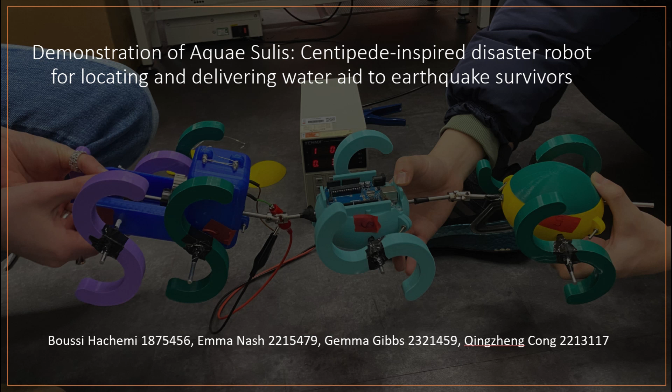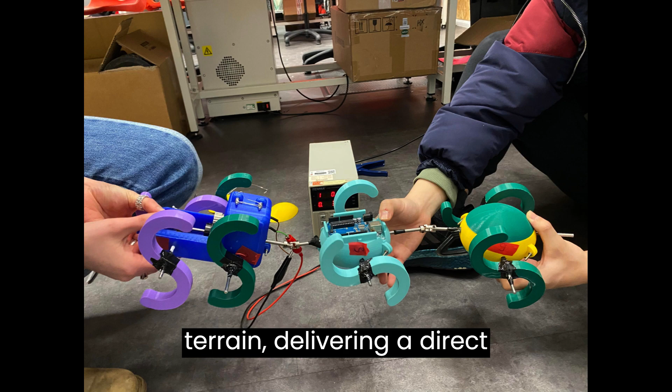Our project goal was to develop a cost-effective, bio-inspired robot to navigate and maneuver through unstructured rubble and underground terrain, delivering a direct communication line and water aid to trapped survivors following an earthquake. This led to the development of SULIS, our centipede-inspired robot aptly named after the Celtic goddess of water.

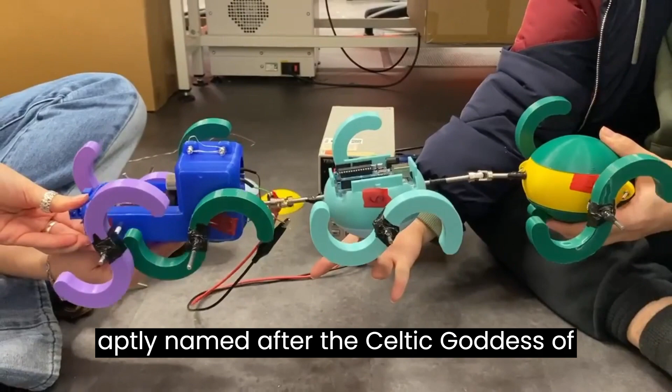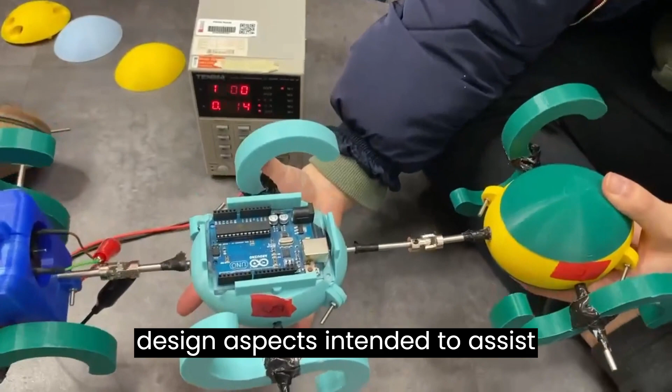Our goal for this demonstration is to provide proof of concept by exhibiting the first steps of this development process, including a functioning modular design with specific design aspects intended to assist movement across the unstructured terrain.

This project was motivated by the increasing occurrences of natural disasters worldwide due to climate change, often leading to the loss of human lives. The first 72 hours post-earthquake are crucial to locate survivors and provide first aid. Although current robotic solutions, including drones and large ground robots, have been used to locate survivors, their applications are limited in scenarios where victims are hard to locate underground and in tight spaces.

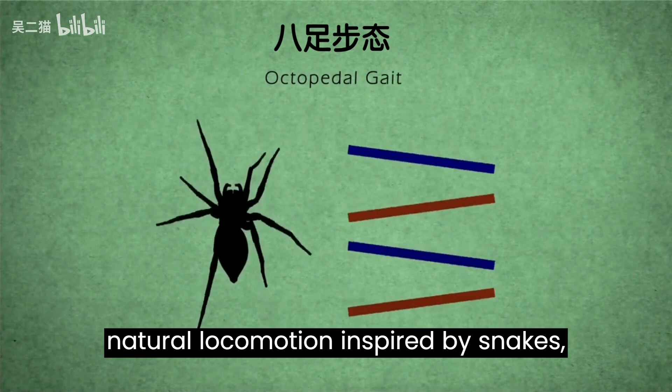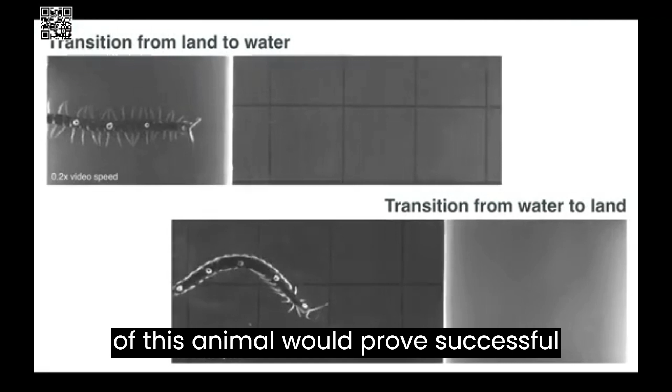We investigated multiple methods of natural locomotion inspired by snakes, salamanders, and centipedes. Due to the centipede's ability to adapt and navigate through challenging environments, we decided that biomimicry of this animal would prove successful, with a modular design with multiple legs working according to a central pattern generator, CPG, network.

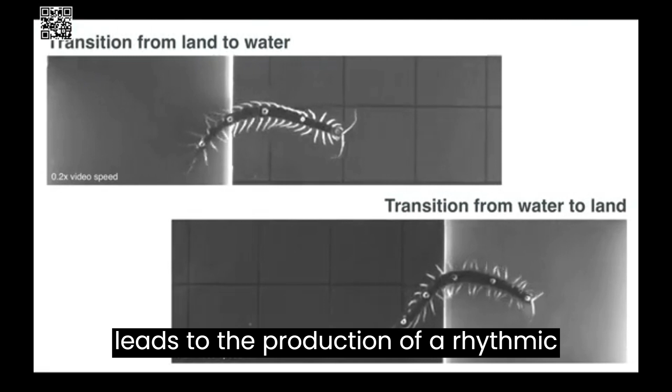This is especially important because it leads to the production of a rhythmic leg motion that stems from the morphological properties of the centipede's body and requires minimal computation.

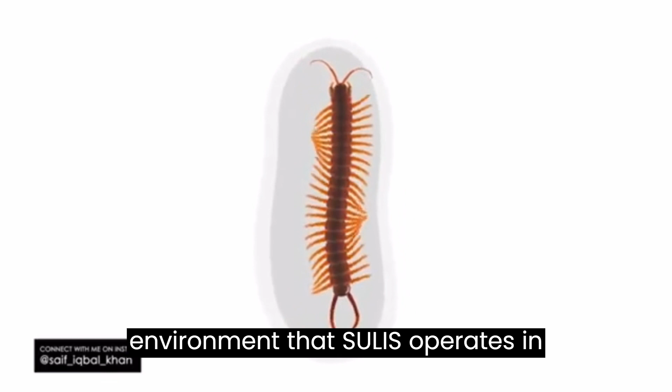The unpredictable environment that SULIS operates in provides several challenges. The robot may need to traverse a variety of surfaces such as soft soil, steep inclines, and large steps. Therefore, a robust body and adaptable locomotion system is needed.

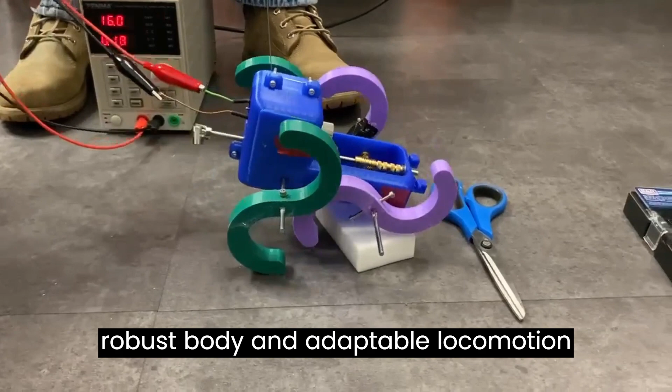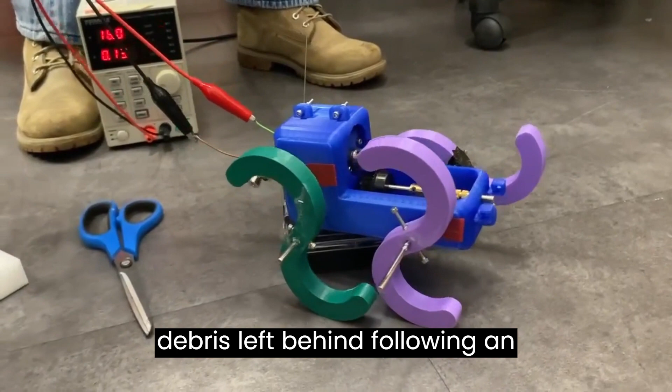The centipede-inspired leg and body structure provides increased flexibility and stability, accommodating for locomotion through the debris left behind following an earthquake. The multiple legs, spread out like a centipede, allows for increased stability, enabling SULIS to navigate without getting stuck in crevices and debris, an environment in which traditional wheeled robots may struggle.

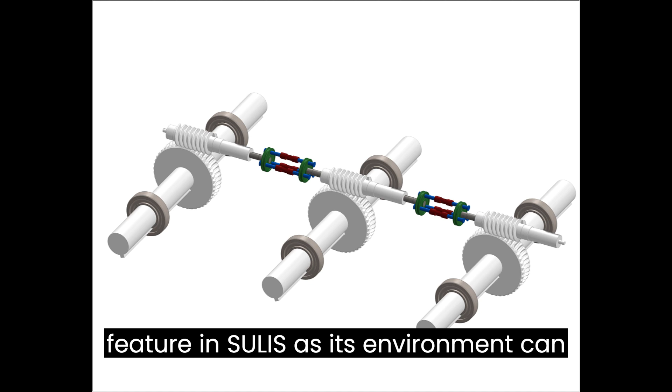Centipede locomotion is particularly inspiring due to its adaptability in different terrains. We aim to encompass these essential features in SULIS as its environment can change rapidly with post-earthquake tremors and aftershocks.

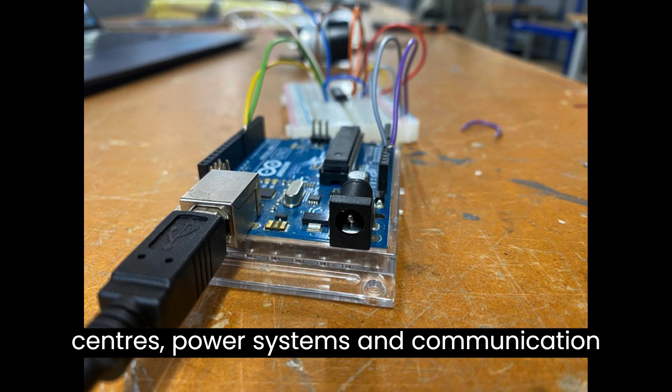The unstructured environment also poses challenges for sensors, power systems, and communication methods. GPS signals are not strong enough for robot navigation underground. Therefore, we considered the incorporation of acoustic sensors and night vision sensors to locate survivors.

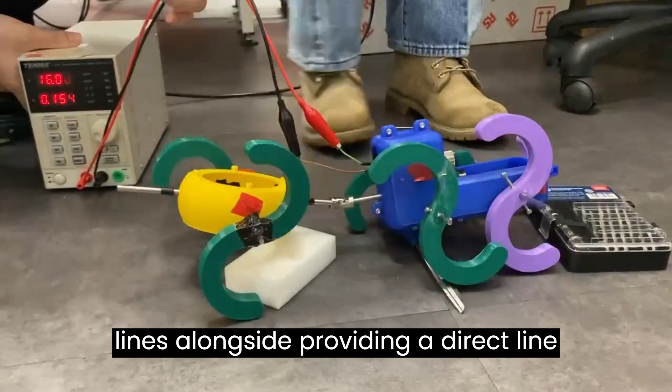The use of multiple modular segments increased driving power and performance stability whilst maintaining a flexible body for locomotion through tight spaces and rubble. A tethered power system provided extra stability for the robot and its communication and water delivery lines, alongside providing a direct line to the survivor once it reached its goal.

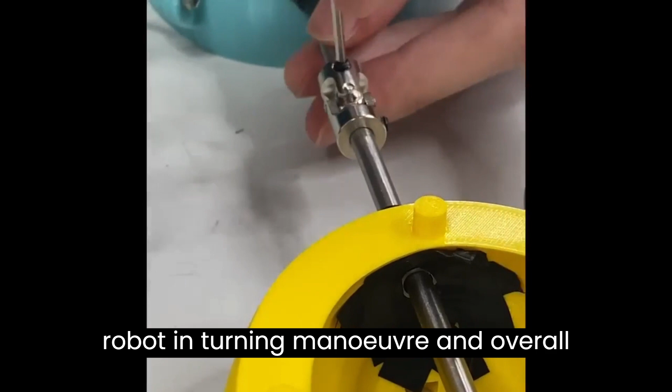Our prototype consists of 3 modules, easily detachable and reattachable, that are interconnected via universal joint, allowing flexibility across the entire robot in turning maneuver and overall traversing complex terrains.

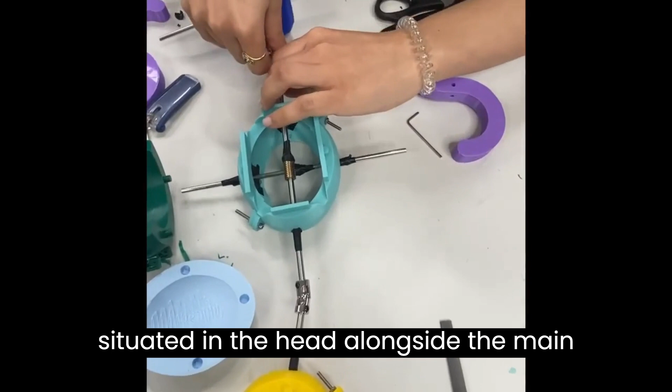The main structure is segregated into the head and body modules, with the power supply, a DC brushless motor situated in the head alongside the main gear mechanism and the breadboard.

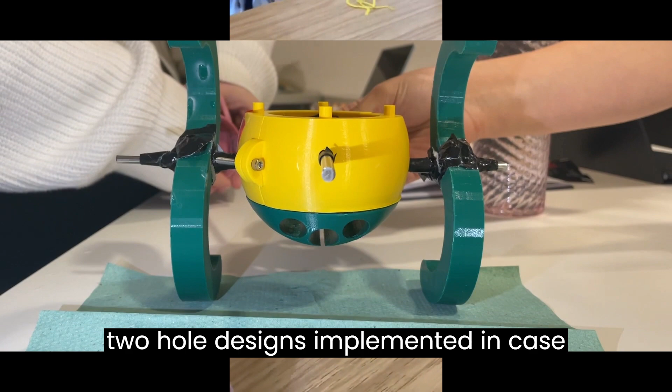Wireless Arduino board resides in the second module to alleviate the weight in the head module. In the belly of each undercarriage runs a power cable, adjacent to the water supply tubes, with 2 hole designs implemented in case there are multiple survivors located simultaneously to maximize on water delivering capabilities.

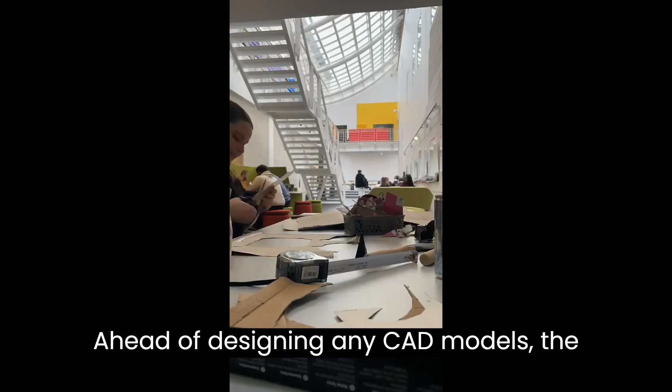Ahead of designing any CAD models, the initial prototype was created from cardboard and was used to observe whether our primary leg movement concept would be successful.

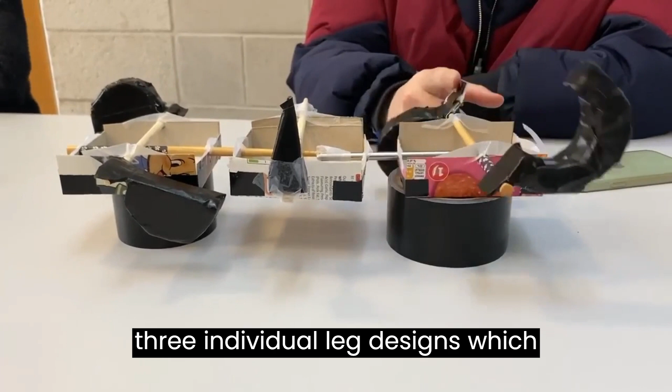Once the gear mechanism was constructed, we tested out 3 individual leg designs, which included a conical shape, a filled semicircular shape, and a hollowed C-shaped leg to determine which would be the most beneficial to our overall design.

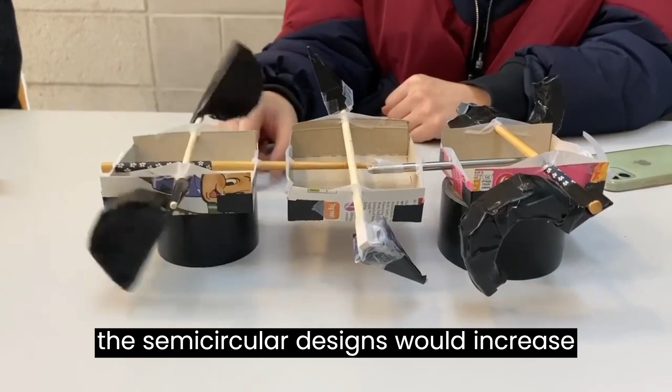As observed through the displayed video, we concluded that the curved profiles of the semicircular designs would increase the ground contact time and frictional properties, whilst being less likely to become stuck or snagged. The C-shaped leg was selected due to it being the lighter option that wouldn't be cumbersome to the overarching robot design.

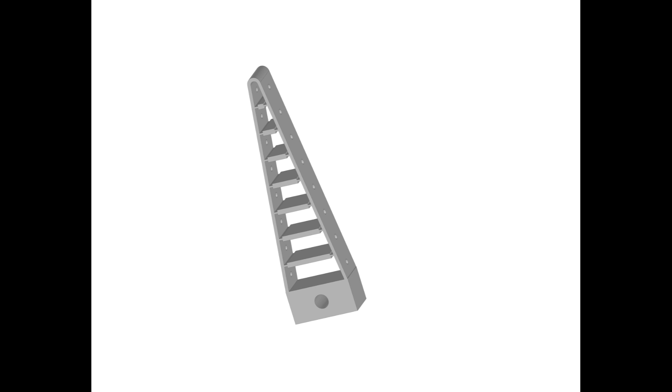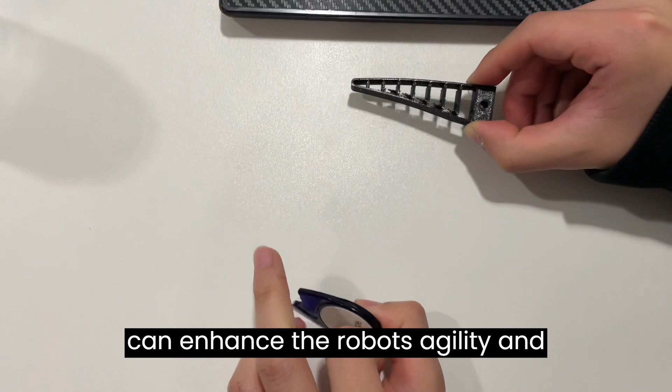We tested alternative materials to develop the legs, including NinjaFlex, also known as TPU. A fin-ray-inspired leg was CAD modeled and hence printed, with increased compliance and deformation to obstacles it came into contact with, allowing the robot to climb over debris without getting stuck. Also, the soft legs are lighter and more flexible than rigid legs, which can enhance the robot's agility and efficiency.

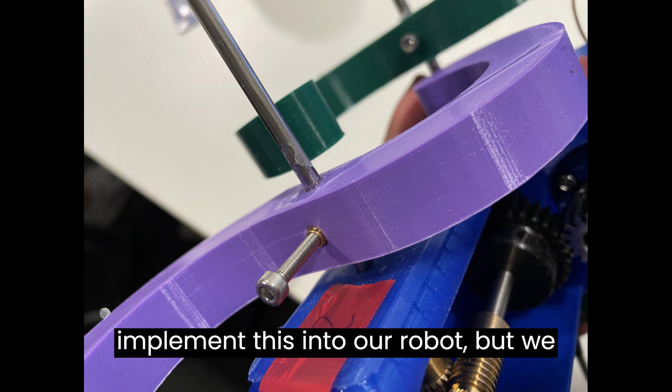However, due to time constraints and TPU material properties, such as the release of toxic gases at high temperatures, which made it incompatible with the heat set element of our design, we didn't implement this into our robot, but we consider it as a future development with alternatives to heat inserts.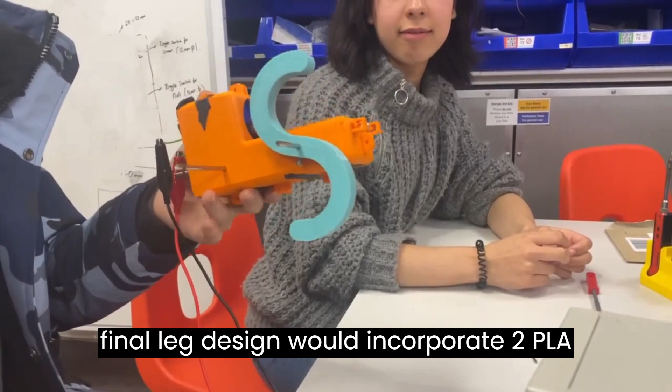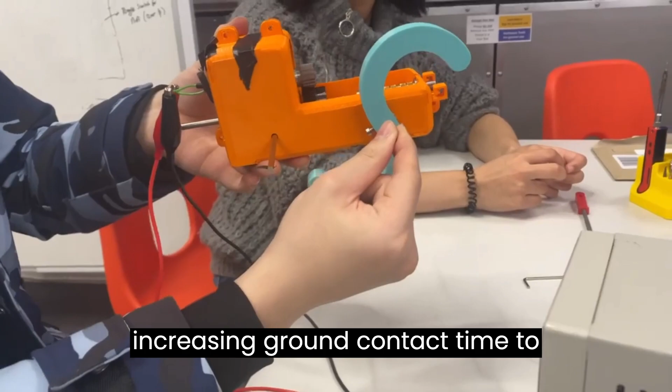Post-training material options and design shape, it was determined that our final leg design would incorporate two PLA printed C-shaped legs combined to form a new S-shaped design that would retain all benefits of the original shape, while increasing ground contact time to stabilize and smoothen movement.

To increase locomotion stability and imitate a closer representation of a typical CPG movement, a 90-degree angle difference was implemented to the leg rotational position that effectively created a lag between the offset of each pair of legs, which therefore kept the robot in contact with the ground for longer.

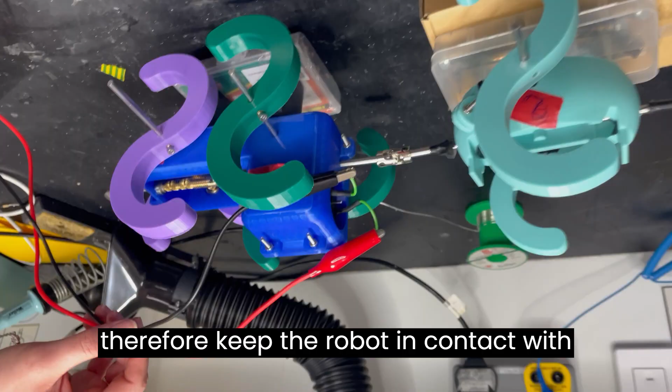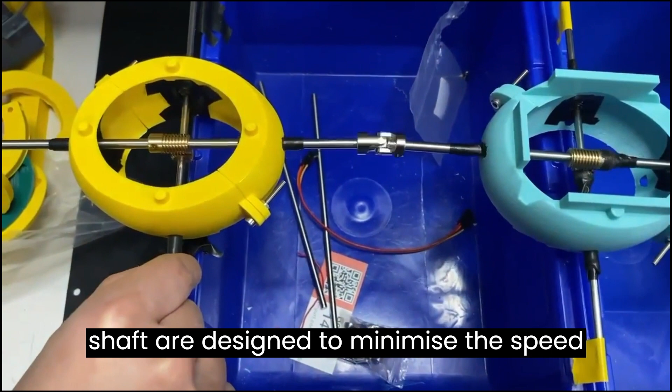A worm gear mechanism is here to help transfer the power from the main shaft to each leg in a vertical direction. The gearing ratio between the motor and shaft are designed to minimize the speed of the robot and increase the torque, so that a single 18-volt DC motor can drive SULIS easily and gives extra obstacle clearance ability.

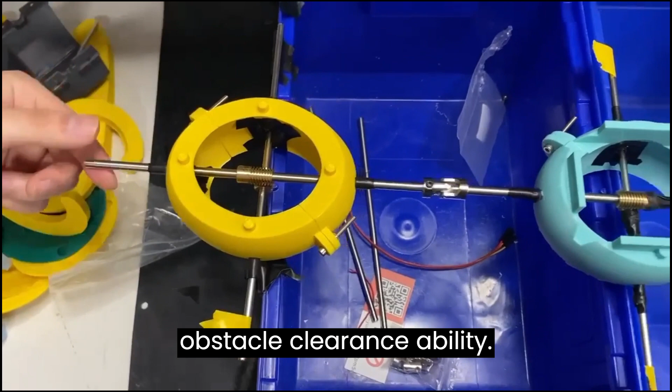The body itself went through multiple design iterations. It began with a Lego connection concept that would allow us to compartmentalize the following sections: electronic circuitry, motor compartment, gear mechanism, and water and power compartments.

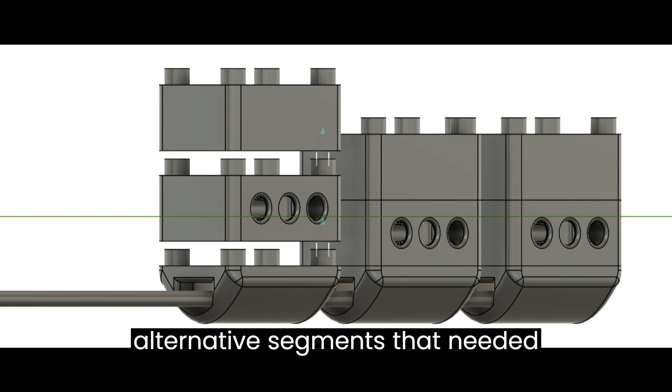As displayed, the Lego design allowed us to deconstruct the robot simply and access alternative segments that needed attention, although this was not bio-inspired enough or compatible with the terrain due to the sharp edges and non-streamlined surface.

Therefore, a second iteration was developed that conformed to the body of a centipede with low frictional surfaces to eliminate risk of snagging whilst retaining the Lego concept to simplify fabrication processes.

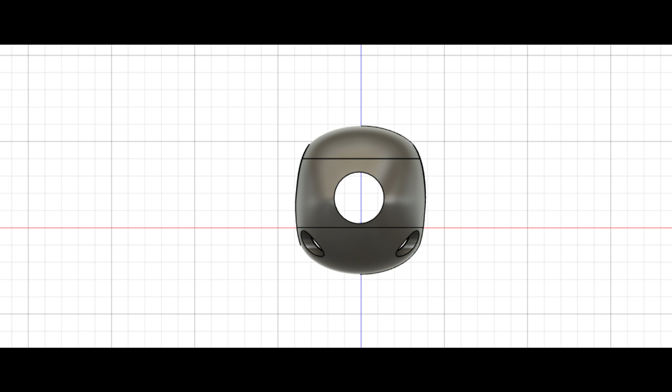The bottom compartment was designated to the power and water cables, as through our stakeholder meetings, the pros and cons of tethered robots were analysed, and it was determined that SULIS would be tethered regarding the water and power cables.

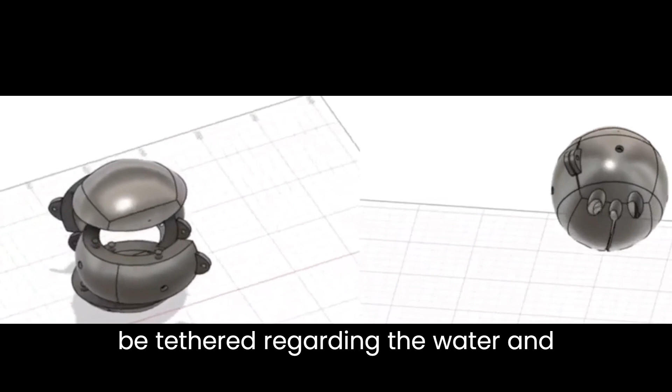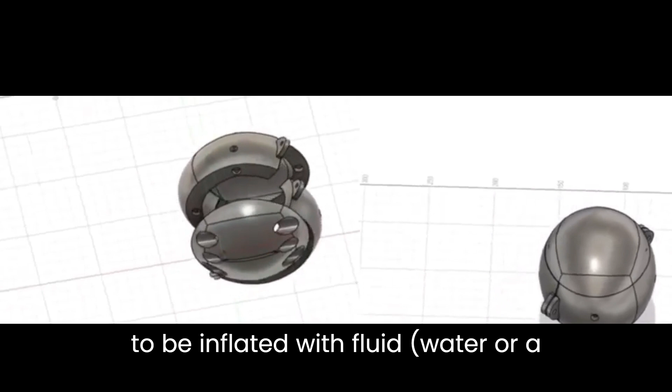This is because a direct power cable could provide more energy to the robot, whilst two deflated pipes would be dragged through and behind SULIS, only to be inflated with fluid, water or a saline solution, once a survivor is located, thus further reducing the weight.

The final adjustment was the addition of the Arduino board that was originally meant to reside within the lid of the body, but due to the Arduino board size, we've removed the lid and simply encompassed it into the body itself.

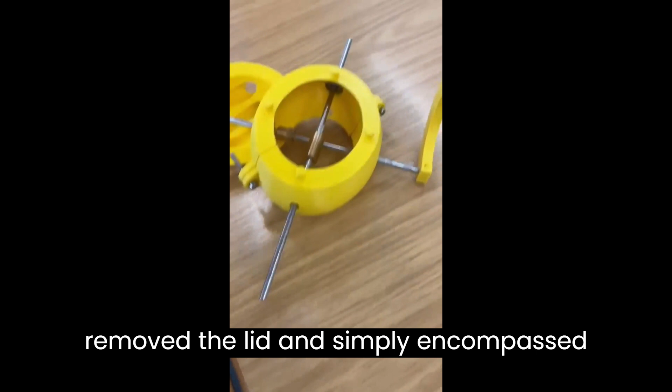The electronic components of the robot include a gas sensor to detect carbon monoxide levels in the surrounding environment, along with a webcam and a microphone.

In order to improve the prototype, several enhancements could be considered, which we've grouped into 3 different categories: improvements to the robot's movement and behaviour, water delivery and control, and data collection.

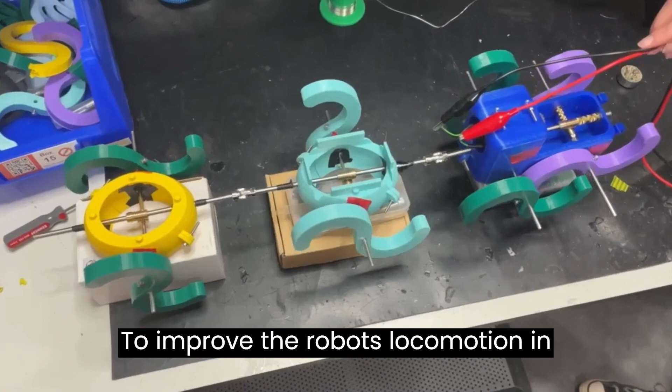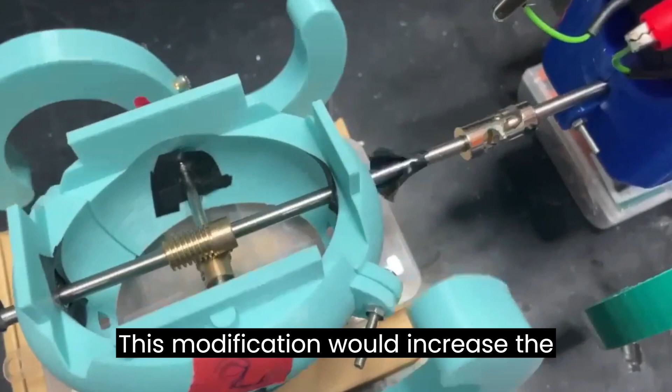To improve the robot's locomotion in unstructured environments, the design of the legs could be altered using soft 3D printable materials such as TPU as briefly investigated, leading to smoother movement and decreased jarring. This modification would increase the robot's flexibility, durability, and ability to maneuver through tight and cluttered spaces.

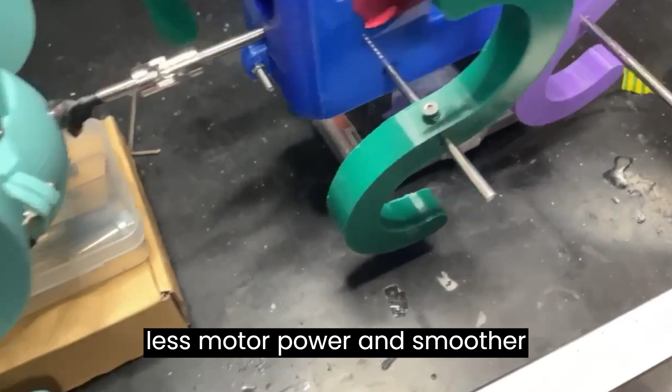Furthermore, shortening the shaft's length would help obtain more compact modules that require less motor power and smoother locomotion. Upgrading to a more powerful motor with increased torque would help support the movement of different robotic modules.

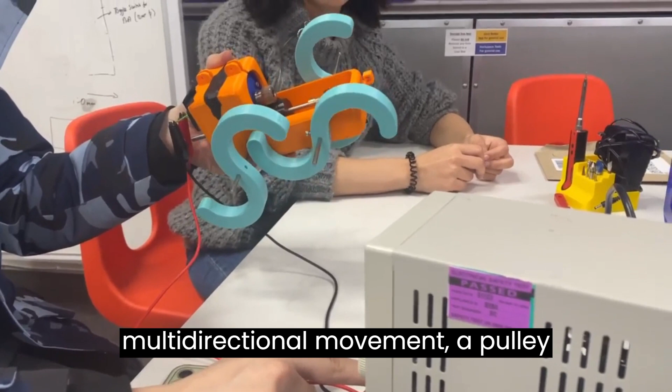Moreover, to enable multi-directional movement, a pulley system could be added, and springs on either side of the universal joints would help dampen the movement.

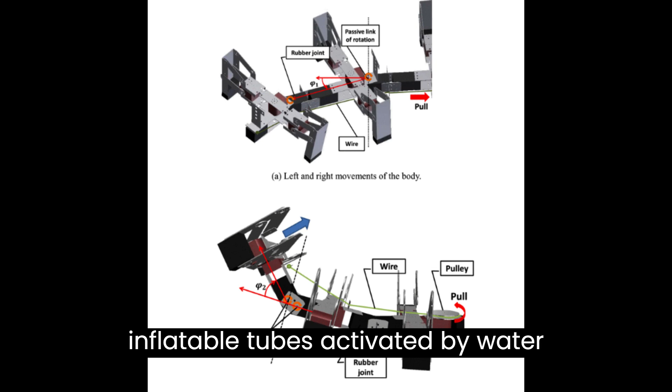One of the robot's missions is to deliver water to survivors on site via 2 parallel inflatable tubes activated by water pressure through designated holes at the bottom of the design.

Since the robot will likely be operated by rescuers and not engineers, a control system that involves a gaming console or computer keyboard is recommended to reduce cognitive load and improve ease of use.

Moreover, the robot's functionality could be expanded by including additional sensors to collect key data, such as thermal cameras to locate survivors or acoustic sensors for aftershock detection. Ultimately, the robot could become autonomous.